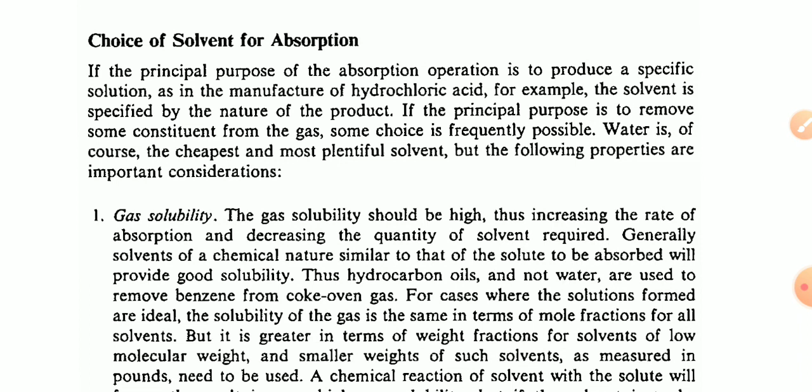The first point: if the principal purpose of the absorption operation is to produce a specific solution, as in the manufacture of hydrochloric acid, the solvent is specified by the nature of the product. If the principal purpose is to remove some constituent from the gas, some choice is frequently possible. Water is of course the cheapest and most plentiful solvent.

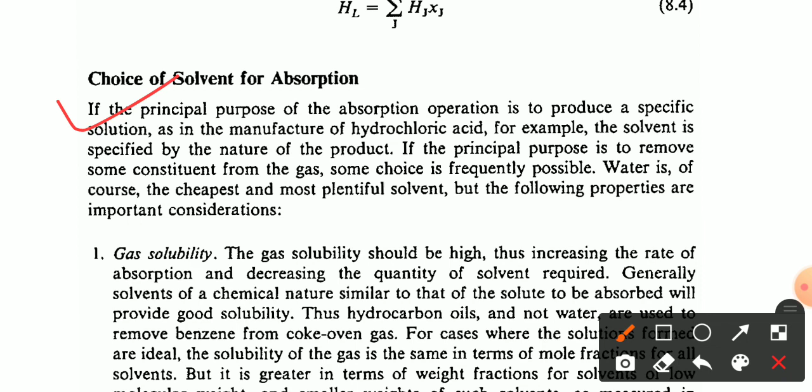In gas solubility, the gas solubility should be high, thus increasing the rate of absorption and decreasing the quantity of solvent required. Generally, a solvent of a chemical nature similar to that of the solute to be absorbed will provide good solubility. The hydrocarbon oils, and not water, are used to remove benzene from coke oven gas.

For cases where the solutions are ideal, the solubility of the gas is the same in terms of mole fractions for all solvents, but it is greater in terms of weight fraction. For a solvent of low molecular weight, a smaller weight of such solvent measured in pounds needs to be used. A chemical reaction of the solvent with the solute will frequently result in very high gas solubility.

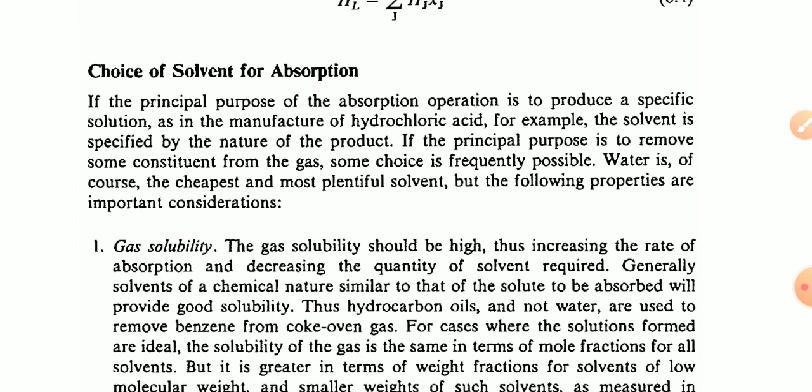So the first point, for gas solubility: gas solubility should be high, thus increasing the rate of absorption and decreasing the quantity of solvent required. Generally, a solvent of chemical nature similar to that of the solute to be absorbed will provide good solubility. Thus, hydrocarbon oils, and not water, are used to remove benzene from coke oven gas.

But if the solvent is to be recovered for reuse, the reactions must be reversible. For example, hydrogen sulfide can be removed from the gas mixture using ethanolamine solution, since the sulfide is readily absorbed at low temperature and easily stripped at high temperature. Caustic soda absorbs hydrogen sulfide excellently but will not release it in a stripping operation.

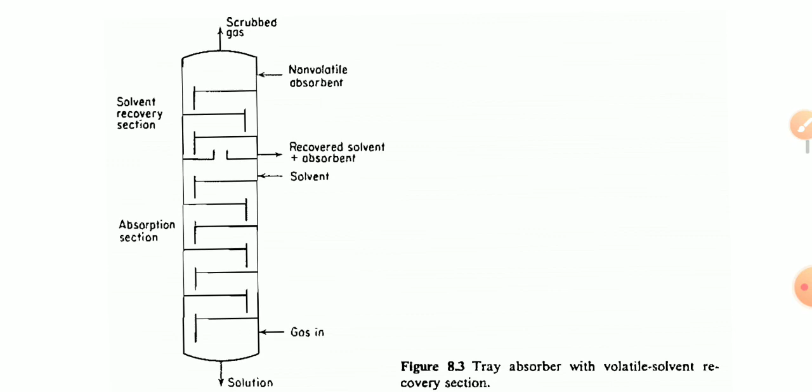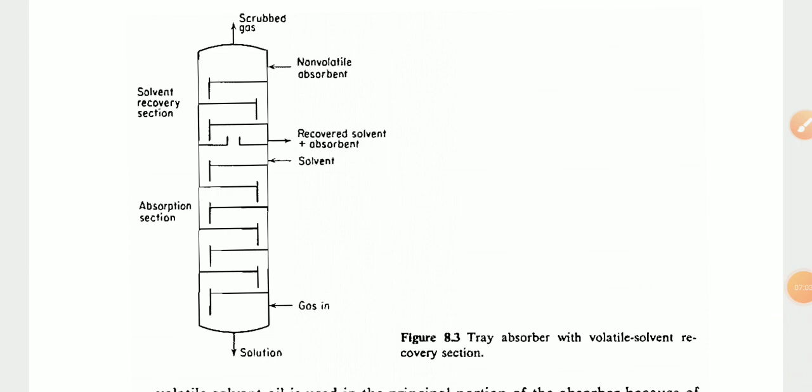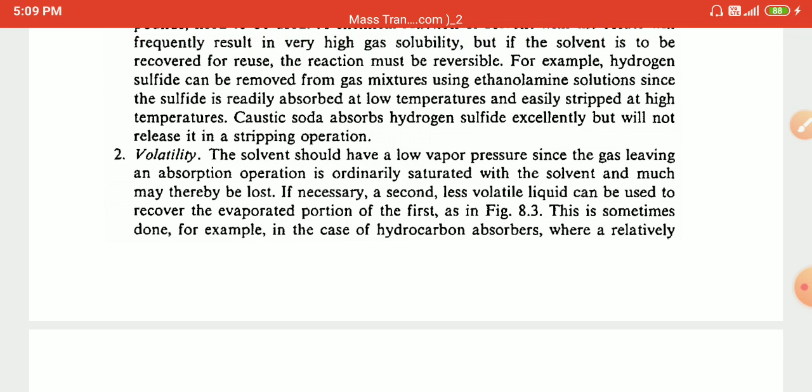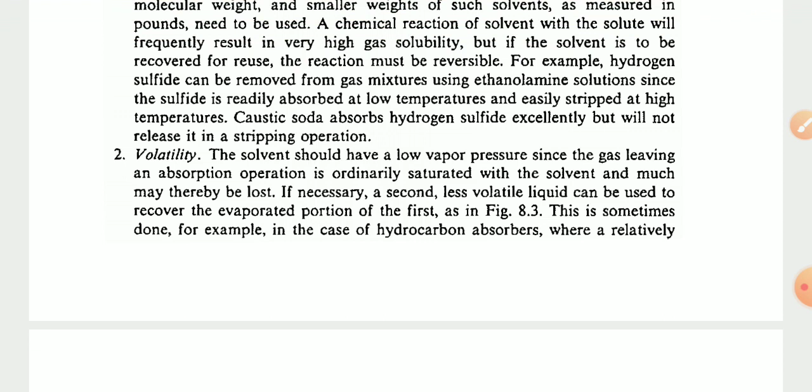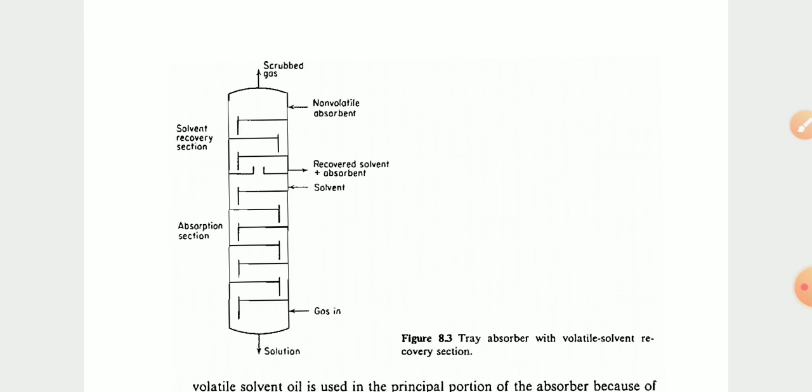So, first of all, the tray absorber with a volatile solvent recovery section part is given - let's discuss how it's done. This is one point of the figure.

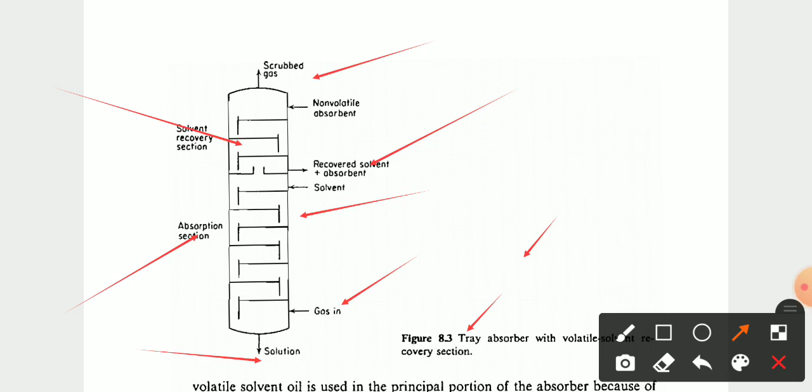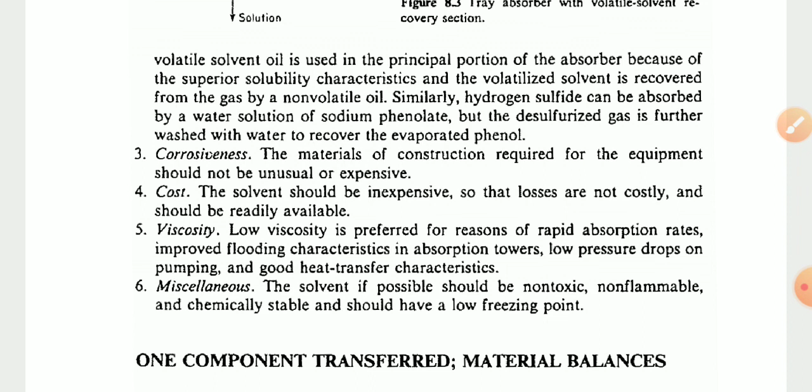Okay, then the volatile solvent is used in the principal portion of the absorber because of its superior solubility characteristics, and the volatilized solvent is recovered from the gas by a non-volatile oil. Similarly, hydrogen sulfide can be absorbed by a water solution of sodium phenolate, but the desulfurized gas is further washed with water to recover the evaporated phenol.

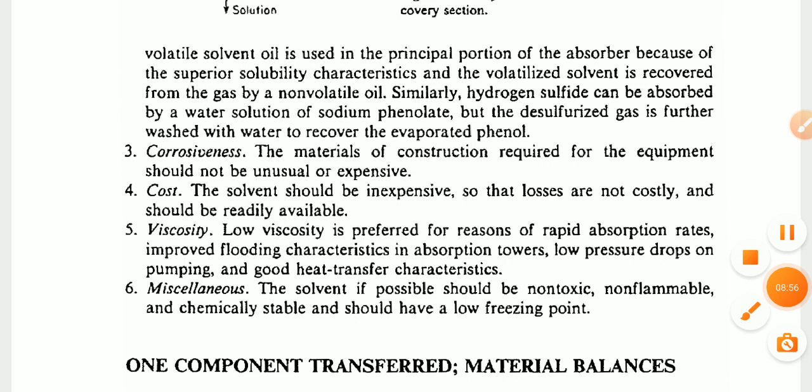This is one: the choice of solvent for the absorption part. If the principal purpose of the absorption operation is to produce a specific solution, as in the manufacturing of hydrochloric acid, HCl, we saw an example of this. The solvent is specified by the nature of the product.

Okay, if the principal purpose is to remove some constituent from the gas, there are frequently several choices of solvent possible. Water is of course the cheapest and most plentiful solvent, but the following properties are important.

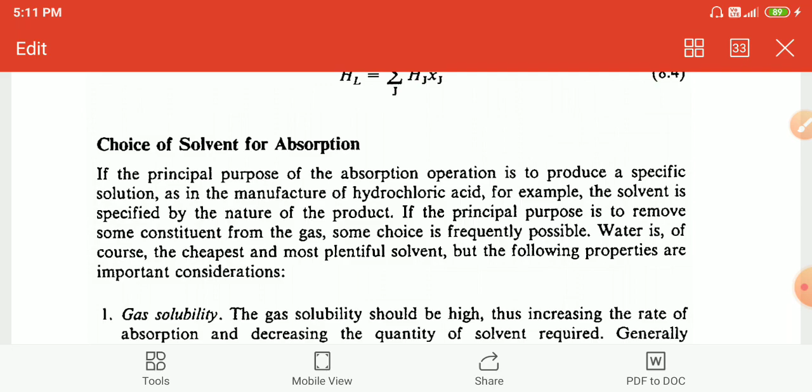Okay, the gas solubility is to be high in this point, in a solvent. We discussed in detail that generally the solvent, according to its chemical nature, similar to the solute to be absorbed, will provide good solubility. The hydrocarbon oils, and not water, are used to remove benzene from coke oven gas.

For the case where the solutions formed are ideal, the solubility of the gas is the same in terms of mole fractions for all solvents, but it is greater in terms of weight fractions for a solvent of low molecular weight, and a smaller weight of solvent, as measured in pounds, needs to be used for such operations.

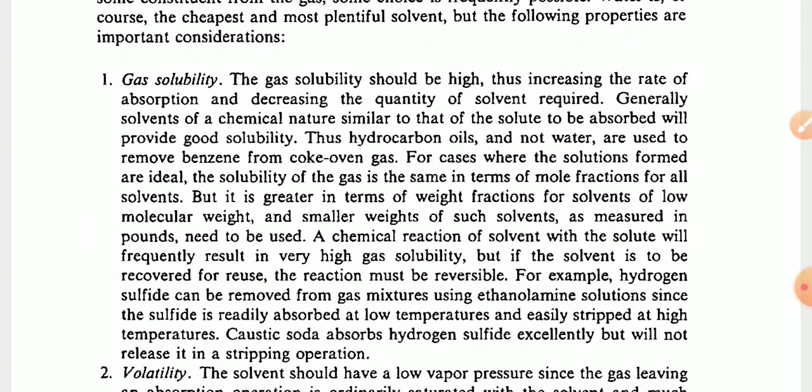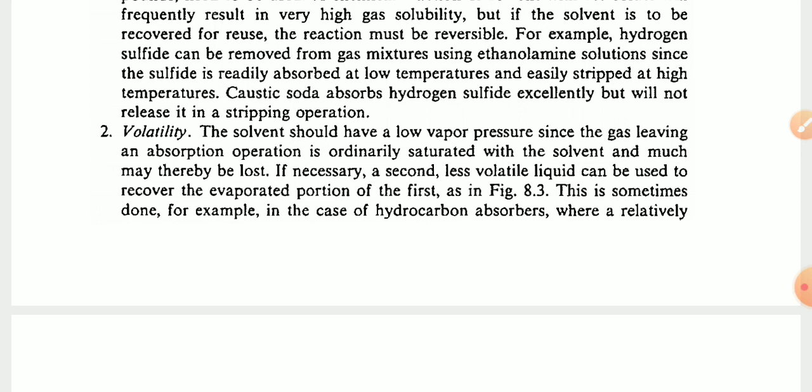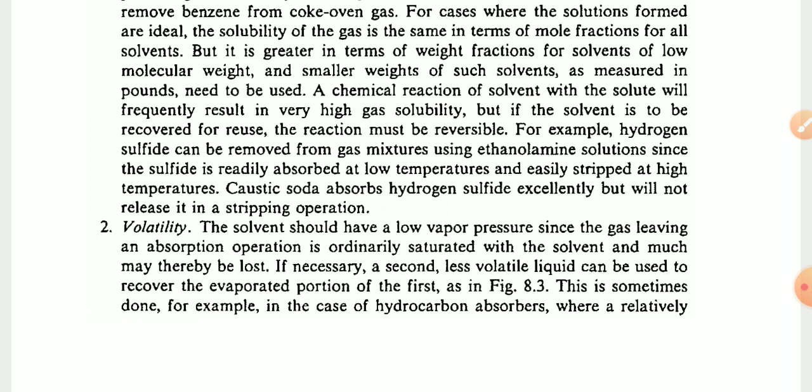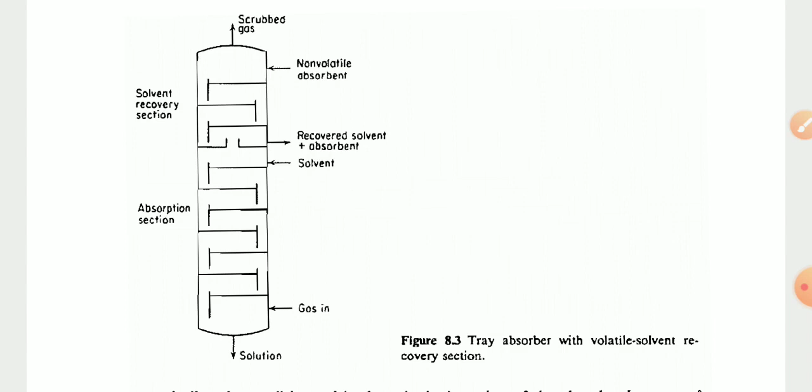Okay, simply watch this part: a tray absorber with a volatile solvent recovery section, given for volatility. Then the solvent recovery section is given, the absorption section is there, recovered solvent plus absorbent solvent, and the scrubbed gas is seen. This is the tray absorber with a volatile solvent recovery part.

With relatively volatile solvent, oil is used in the principal portion of the absorber because of its superior solubility characteristics, and the volatilized solvent is recovered from the gas by non-volatile oil. Similarly, hydrogen sulfide (H2S) can be absorbed by a water solution of sodium phenolate, but the desulfurized gas is further washed with water to recover the evaporated phenol.

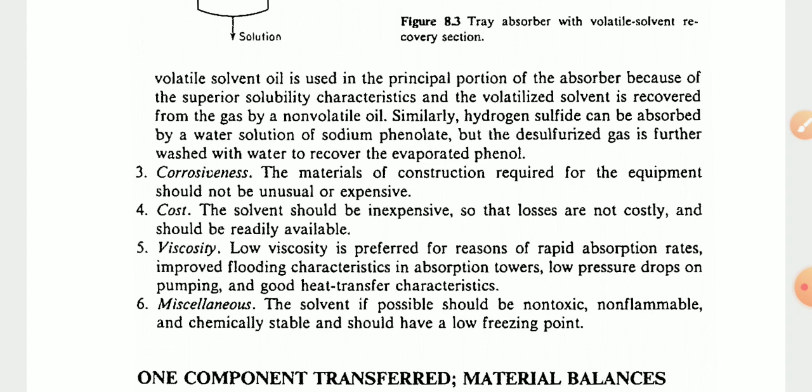Okay, the corrosiveness, third point - corrosiveness, there are six points total, remember them. Choice of solvent for gas absorption: first gas solubility, second volatility, third corrosiveness. Let's look at it in detail - the material of construction required for the equipment should not be unusual or expensive.

What does it do? For corrosiveness, the material of construction required for the equipment should not be unusual or expensive. The cost: the solvent should be inexpensive so that losses are not costly, and should be readily available. The viscosity: low viscosity is preferred for reasons of rapid absorption rate. So, first gas solubility, second volatility, third corrosiveness, fourth cost.

In cost, we saw that the solvent should be inexpensive so that losses are not costly, and should be readily available. And number five, viscosity: low viscosity is preferred for reasons of rapid absorption rate, improved flooding characteristics in absorption towers, low pressure drop on pumping, and good heat transfer characteristics. This is the overall basis.

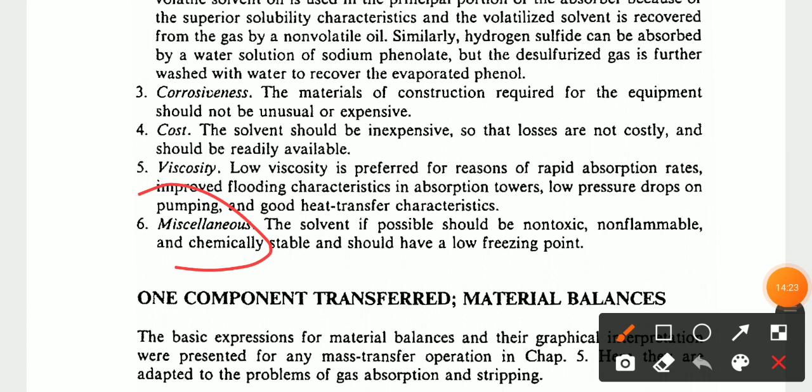The last one is miscellaneous. What does miscellaneous mean? This one: the solvent, if possible, should be non-toxic, non-flammable, and chemically stable, and should have a low freezing point also. The material of construction required for the equipment should not be unusual or expensive.

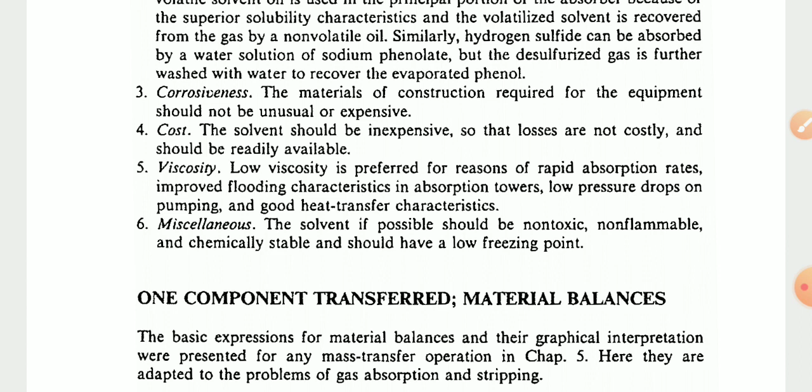And number three we saw - corrosiveness, in cost we saw the solvent should be inexpensive and readily available. Viscosity: low viscosity is preferred for rapid absorption rate, improved flooding characteristics in the absorption tower, low pressure drop on pumping, and good heat transfer characteristics also. Miscellaneous: the solvent, if possible, should be non-toxic, non-flammable, and chemically stable, and should have a low freezing point also. Okay, the topic is completely over.

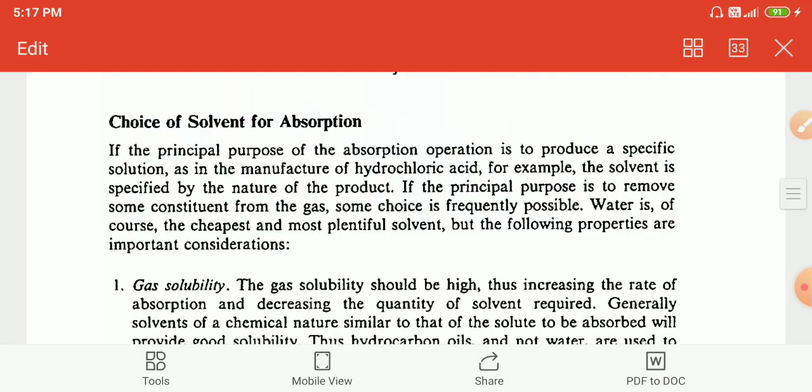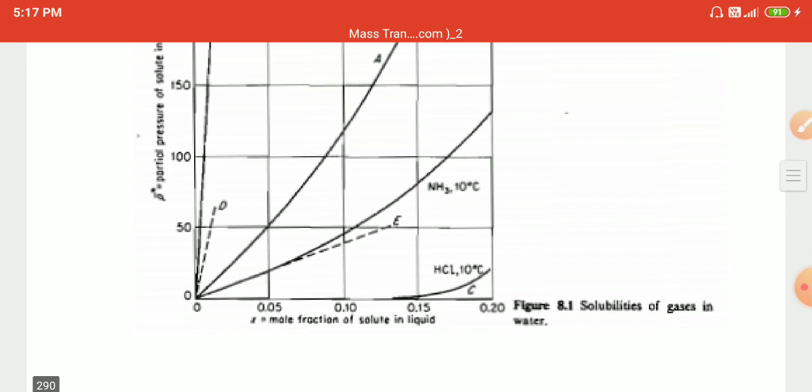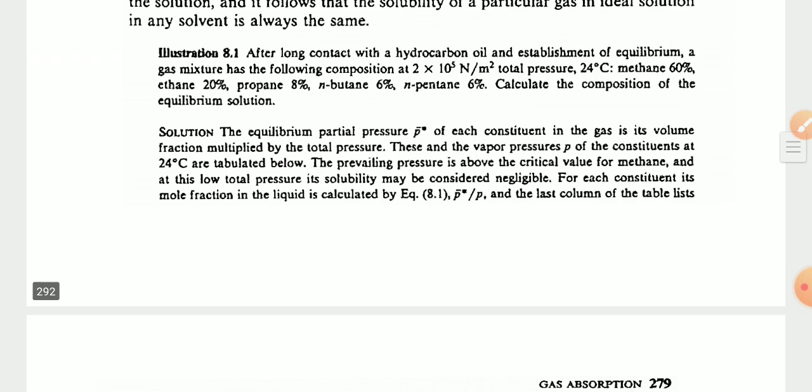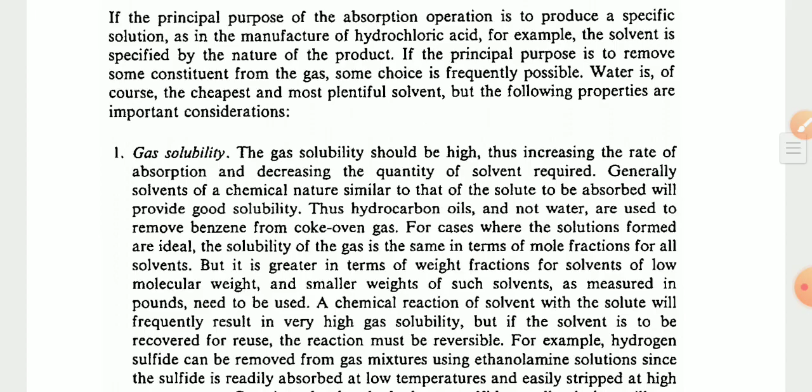This one, gas absorption. Introduction part, equilibrium solubility of gases in a liquid, two component system, multi component system, ideal solution, Henry's law, Raoult's law, and non-ideal solution with Henry's law. And today's important topic, choice of solvent for absorption, which includes gas solubility, volatility, corrosiveness, cost, viscosity, and miscellaneous.